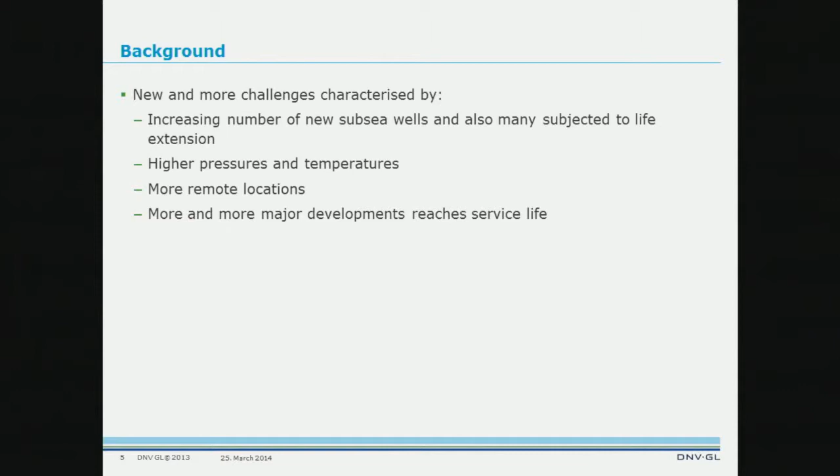So what is the background for doing this report, and what is the concern? We are seeing new and more challenges characterized by an increasing number of new subsea wells, many subjected to life extension, higher pressures and temperatures pushing the limits, more remote locations, more major developments reaching end of service life, and new actors entering the Norwegian continental shelf as operators.

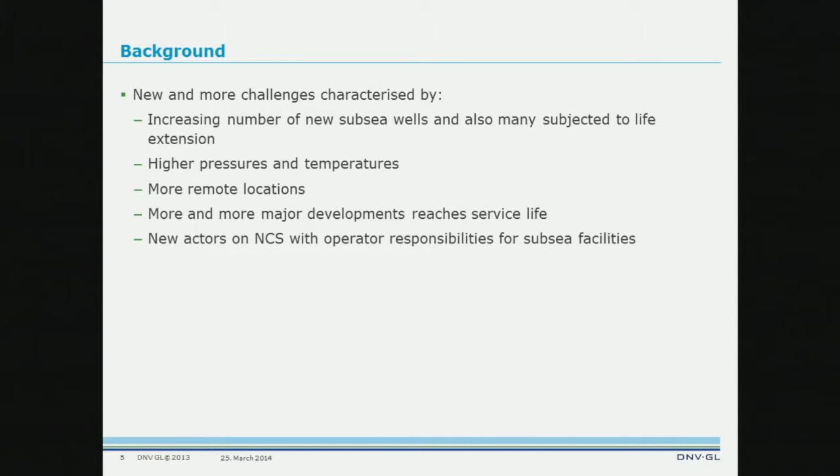Here, cut from the PSA's web pages regarding this meeting today: many projects in planning and implementation stages lead to PSA's expectation of high activity in evaluations of older facilities as well as installation of new ones.

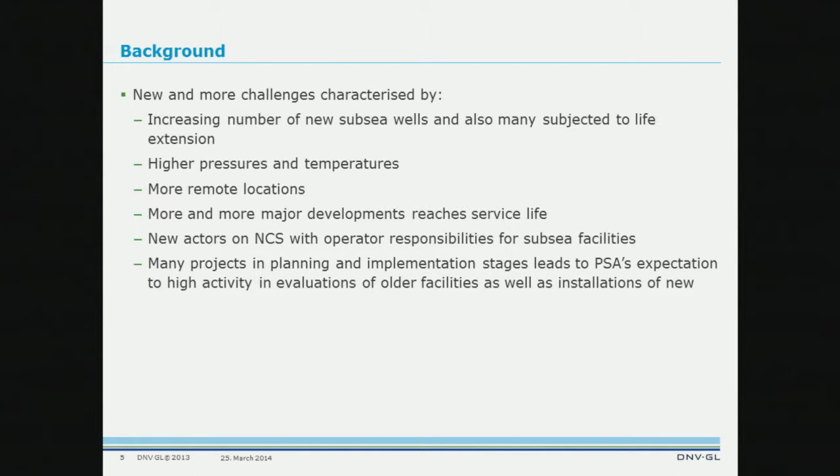In the big picture, if theoretically we have a fixed number of new fields coming up for development, more and more of those fields will in the future be based on a subsea solution. That means the net contribution of new subsea wells will be higher year on year, meaning we are having a kind of exponential increase in the number of subsea wells. This makes the population of subsea wells bigger, and at the same time we are extending the life of those already in service—combining pushing boundaries, extending life, and new operators.

So the general question is: are we exposing ourselves to a higher risk level with respect to possible accidents?

The purpose of the document: it shall raise awareness to the challenges in the industry, serve as a guideline to new operators and suppliers entering the Norwegian continental shelf, capture lessons learned from about 30 years of subsea development, highlight applied technologies and guidelines for different selection criteria, and serve as a guideline for operating a subsea field with organizational aspects as well as awareness of the physical degradation mechanisms that exist.

Share experience with incident databases and suggested improvements. And finally, the document is written to be educational—for those entering this industry, there is a lot of learning from reading this document. Seeing the purpose of the document, it is really a tall order, and we did our best to navigate and fulfill all those requirements.

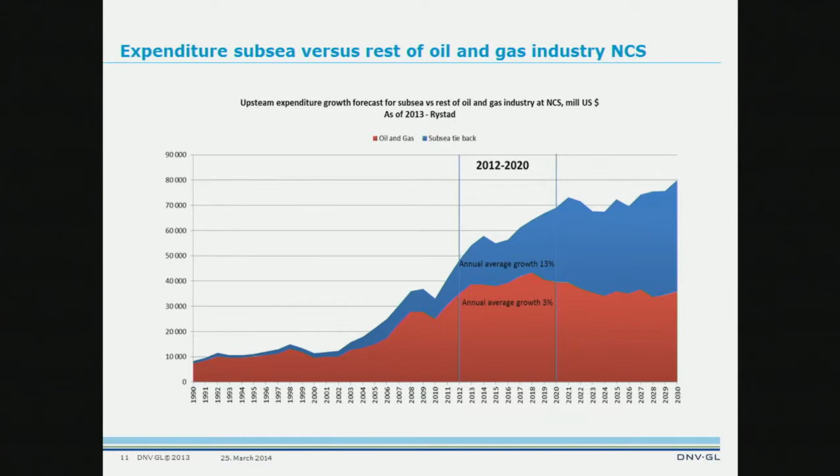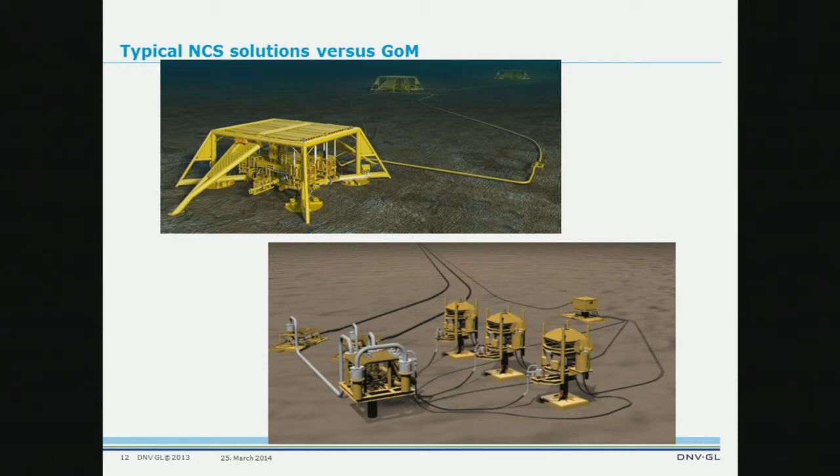The traditional way of doing this in other regions, this one taken from a Gulf of Mexico field that Chevron was developing years back. Here we have a manifold sitting on its own foundation, with the trees centralized and clustered around it. Here we have the tie-in points to a pipeline end terminal, and a jumper spool into our manifold. We also have the control system's subsea distribution unit, which controls and feeds the control modules on the trees and manifold with power and controls. That is also located here and is often referred to as the manifold control module.

So those are the basic differences in what we are doing in Norway compared to other parts of the world.

Coming to tree concept selections, in the first period it was the vertical Christmas tree, or the conventional tree, that was dominating the picture in Norway, making the word conventional in its full right. What happened from about 98 to about 2000 was a dominant shift to the horizontal tree concept in Norway, really a dominant position in that tree selection.

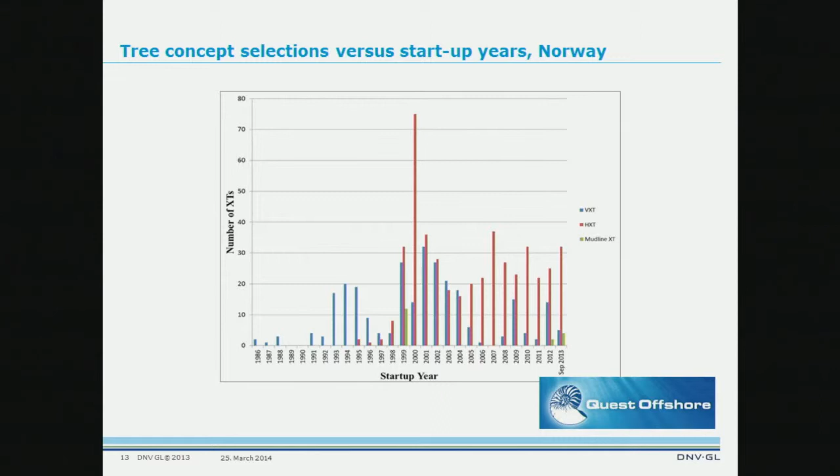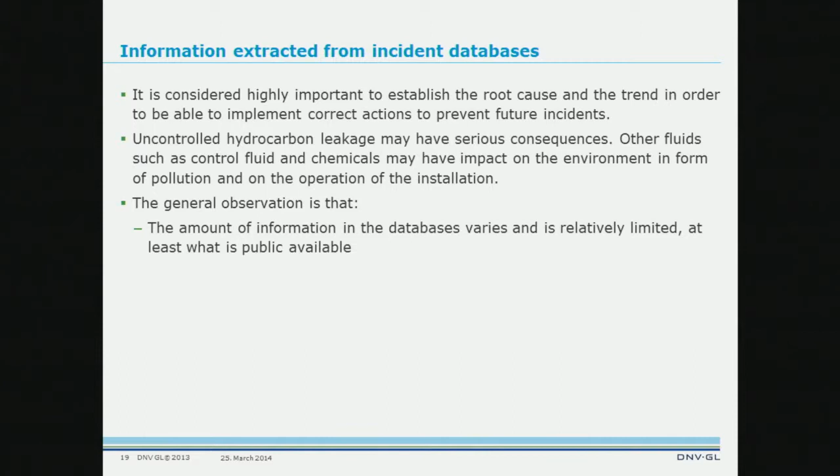There is limited information available on whether the leakage occurred due to operation outside the design or operation window. The information indicates that leakage often occurs during a transient situation, such as drilling, workover, or other intervention activities, and not so much in production mode.

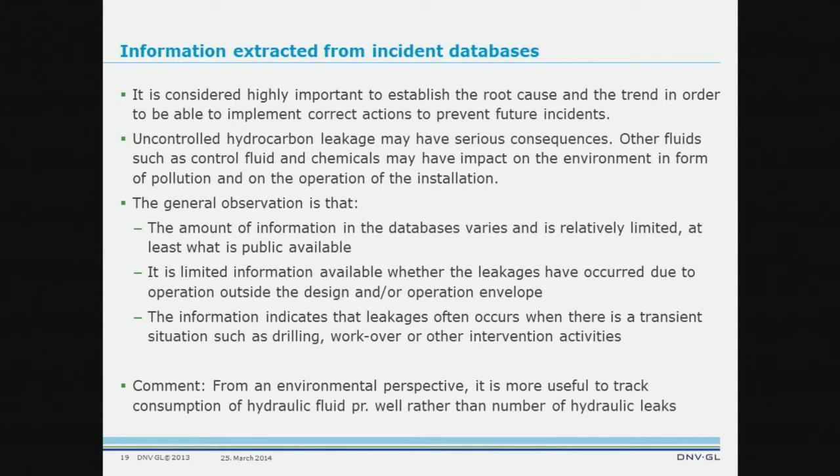We made a comment here yesterday. From an environmental perspective, it is more useful to track consumption of hydraulic fluids per well rather than the number of hydraulic leaks. That is because some of those fields actually have a quite significant number of liters of hydraulic fluid consumption.

So in the search for information on the largest accidents and releases of hydrocarbons from subsea facilities, public sources from the national safety authorities have been sought and reviewed. The content of those varies. Clear information on volumes, type of leakage, root cause, etc. is not easy to retrieve.

Also, the reports can be quite substantial, and we have to read quite a few of them to understand what has happened. However, the information in the databases shows that releases from subsea production systems are relatively few and small compared to those from other activities, installations, workover, and drilling.

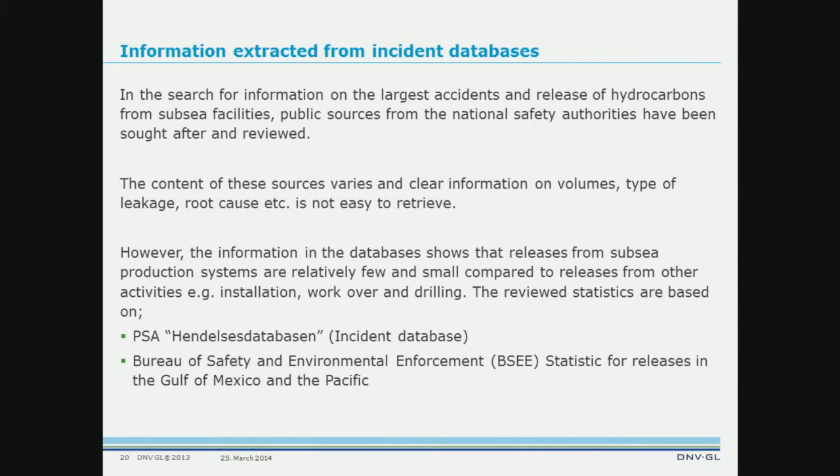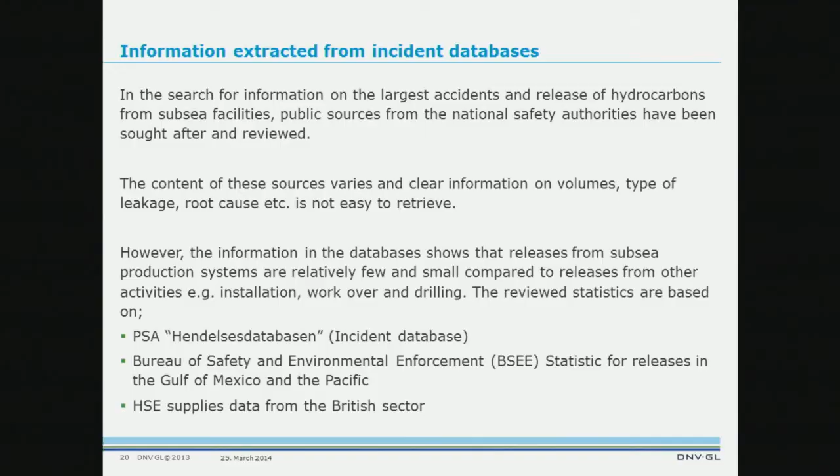The reviewed statistics are based on the Petroleum Safety Authority's Hendelsesdatabasen incident database, BSEE, and HSE from the British sector. Releases from subsea production systems are relatively few and small. I think that is something we have to reflect on a bit, so we can be a bit proud that the subsea station is basically sitting there and doing the job quite safely.

When we are interpreting the data, we see there are guidelines and guidewords for how you shall characterize your incident. We see that the one from HSE in the UK and the one in Norway, in a way, are quite conforming to each other. When reading them and the guidewords for how we characterize the different accidents, they are understood to be a bit different.

Here is the one we got from the authorities in the States, and we are seeing loss of well control here. When we see that one, it doesn't tell us much about the root cause.

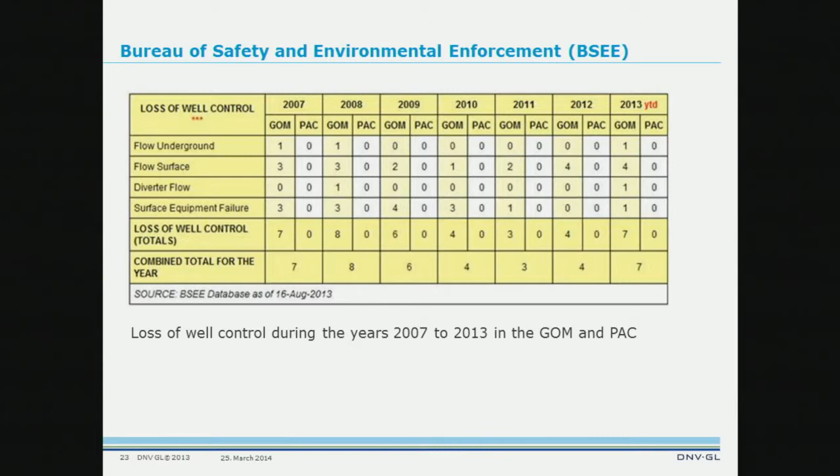General experience from those databases: the root cause is very hard to find. In many cases, it is not even clear to distinguish if the leakage came from a subsea or a topside facility. The impression is that in many cases, the incident is entered as an incident, and the information is not updated when the incident has been rectified.

So the conclusion is not there. The incident is reported in, but the conclusion is not there. Some reports are comprehensive in format, and several reports have to be examined in detail to reach a conclusion.

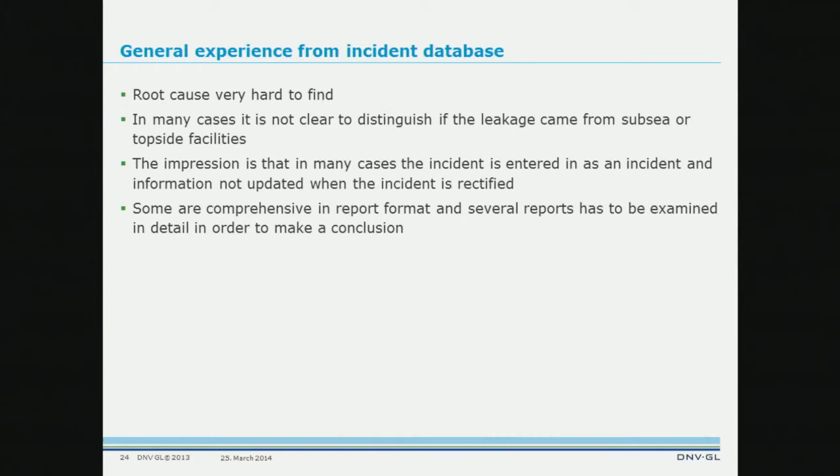So, of the incidents that we have been able to retrieve from public sources, from NCS, we have one in 2013. A bleed valve was set in the open position by mistake. The estimated oil spill was about 2.5 tons, and we have the reference here.

In 2003, the largest uncontrolled oil spill from an NCS subsea installation happened when 500 to 800 cubic meters of oil leaked out due to a rupture in the connection between the manifold and production line to platform. That one is also referred to in the report and publicly available.

From July 2002 until January 2003, about 30 cubic meters was released due to wrong operation of a valve on the manifold, also documented here.

UK, 93: there was a leakage from a wellhead on the UK sector where approximately 13.5 cubic meters of oil leaked out. The cause was mechanical failure during shutdown of the well, also documented.

96: a tree was leaking about 41.6 tons of gas. The operational causation in the HCR database is dropped object.

96: a leak was discovered during final commissioning of a subsea manifold. The root cause was identified as HISC. That one is also very well known in the industry.

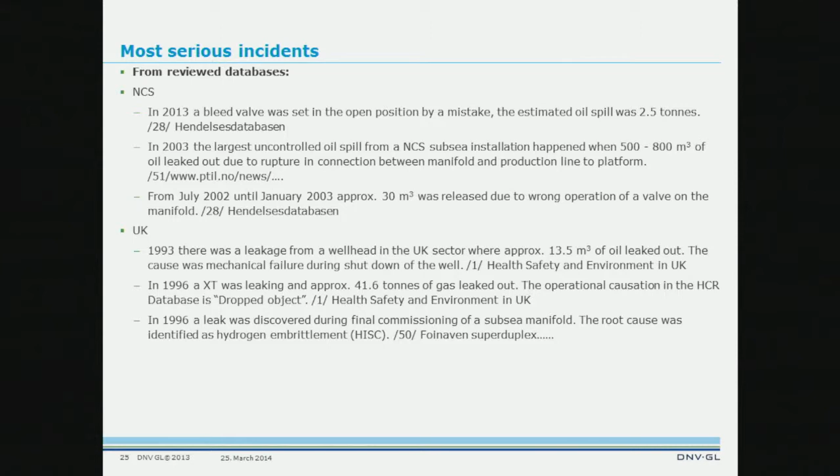So, integrity management. This section of the report describes several aspects: system integrity, subsea integrity management system, life cycle information, barriers - something Trond pictured in detail in previous presentations - threats, safety philosophy, integrity management process, guidelines and standards for establishing a subsea integrity management system, and main challenges related to integrity management in operation.

So first, a definition of subsea integrity management: the management of a subsea production system to ensure that it delivers according to the design requirements and national regulations, and does not harm life, health, or the environment throughout the required field life.

This implies that the operator needs to establish, implement, and maintain a management system that ensures integrity of the system throughout its life. So we establish the integrity system during concept, design, and construction, and maintain it during operation. Risk assessment and integrity management planning means inspection, monitoring, testing, integrity assessment, and mitigation, intervention, and repair throughout - and I would say it must also include the final stage.

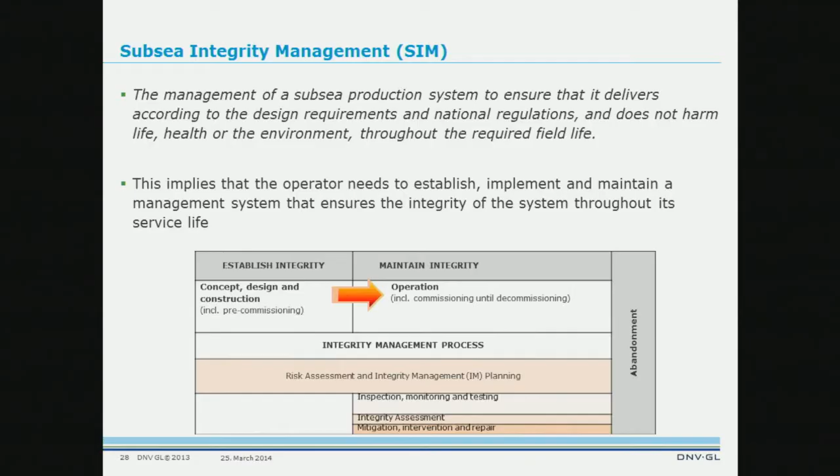Is there an existing prediction model in the industry? We are also giving references to what prediction models there are, along with a general comment on that degradation. So I said 15 mechanisms are described in the report.

When we come to thermoplastics and elastomers, again 15 mechanisms are described - what is the degradation mechanism, what does it mean, and what is the explanation for it? I think there's a lot of learning for the industry here to see what is actually in this report when we come to degradation mechanisms.

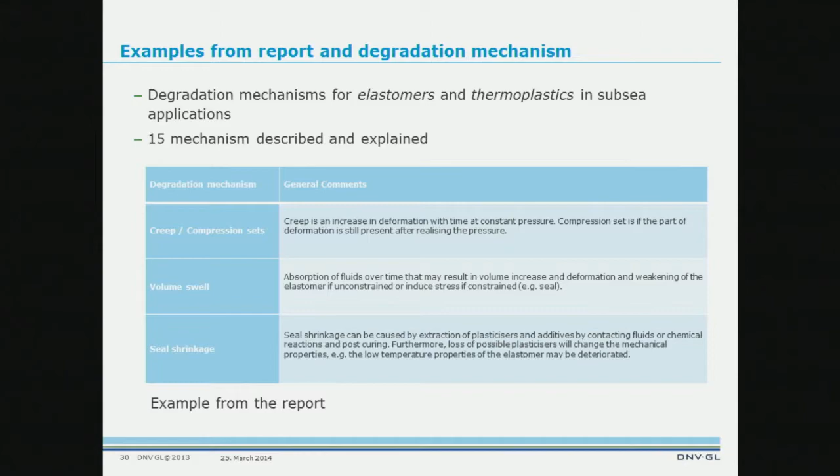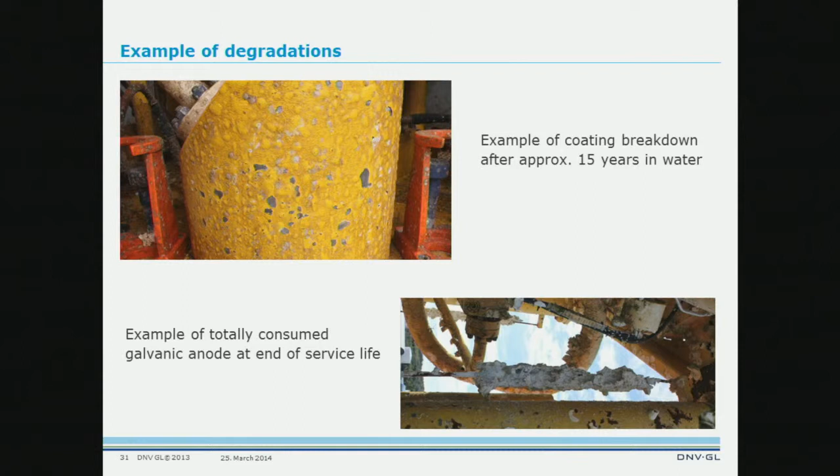When we come to threats, we have identified 69 threats, which are listed, documented, and explained - this is just an example. So here we just have two, but there are, as I said, 69 of them. There's a lot of experience transferred, given free to the industry through this report. By reading the report, probably a bit too much - but anyway, they are here, and I think it is good learning for the industry to have access to these.

So, future trends, developments, and challenges. Coming to that area, I really feel that OG21 with the TTA4 did a splendid job making a very good report, talking about the technology gaps for the future. They tabulate those gaps, and they say how much it will involve to design them, to test them, to develop them in figures and money, and also what is the time frame for that technology to be available and project selectable.

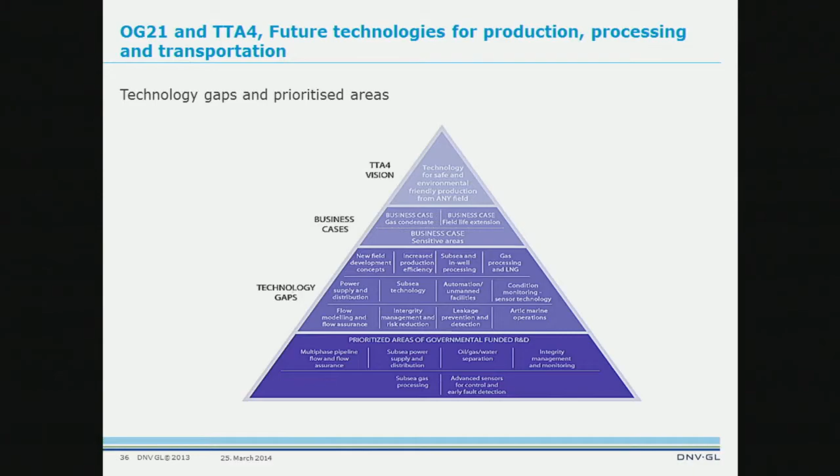Looking at this report, there are a lot of technology gaps in the hands of the industry, and also prioritized areas where governmental funding is required in order to get further. That report is also freely available on the internet, and for those who aren't familiar with it, download it, look into it. When it comes to technology for the future, I think it is one of the best and most comprehensive documents out there at the moment.

So a bit of advertising other initiatives going on in the industry as well. This one is going to be guidelines for how Petromaks and Demo channel their money, and also a guideline for the Ministry of Petroleum and Energy on how to plan for the political society for this industry in the future.

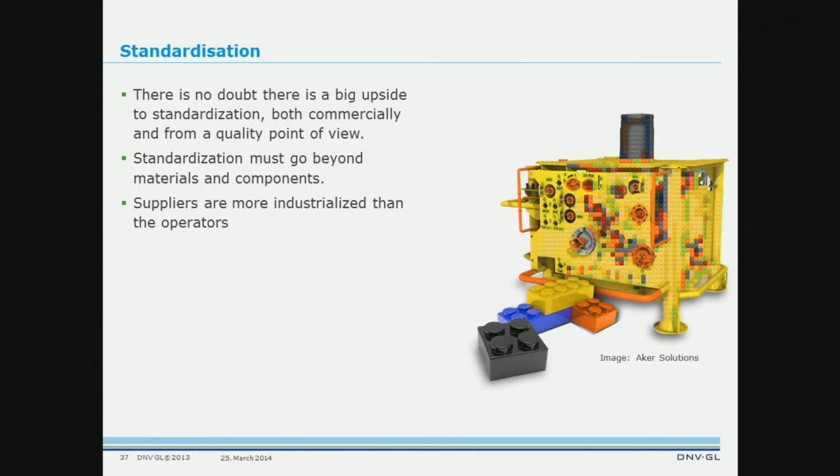So, standardization for the future. There's no doubt there's a big upside to standardization, both commercially and from a quality point of view. Standardization must go beyond materials and components. Suppliers are more industrialized than operators.

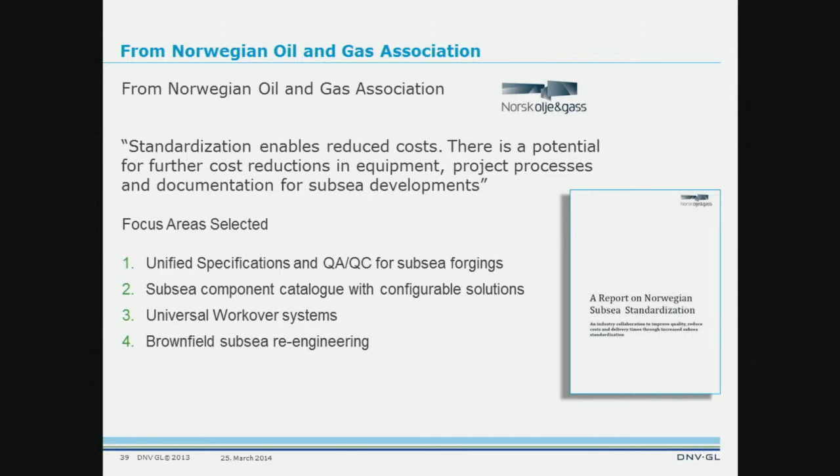There is a report that Norwegian Oil and Gas was commissioned to take care of, through Konkraft, with the Subsea Installations Network, and the contributors prepared this report. I think it's a good report, and what is said is that standardization enables reduced cost. There's a potential for further cost reduction on equipment, project processes, and documentation for subsea developments. Six focus areas were selected: unified specification and QA/QC for subsea forgings, subsea component catalog, universal workover systems,

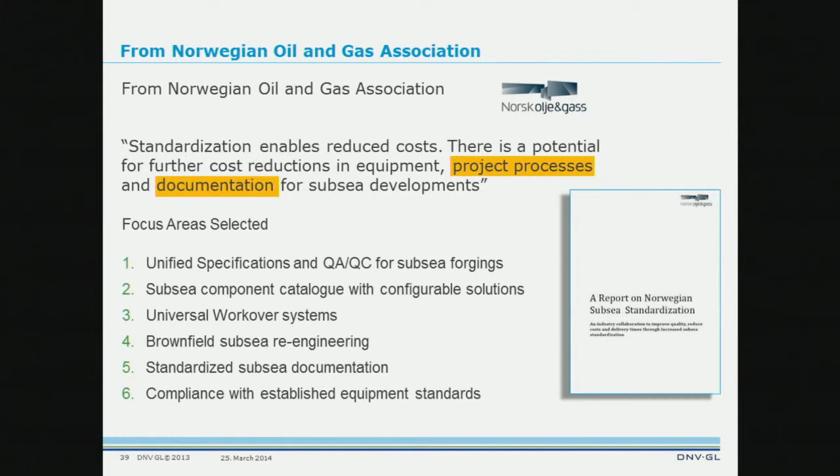brownfield subsea re-engineering, standardized subsea documentation, and compliance with established equipment standards. So here, both areas 5 and 1 are now in project phase and actually being taken care of by the industry. But I am personally very pleased to see that project processes and documentation are also addressed, and not only components and materials. And for those who know me, they're probably sick and tired of hearing it, but I have an example.

That is the Ford Transit. You can have it as a van, as a lorry, as a bus, different wheelbases, petrol engine, diesel engine, automatic gearbox, manual gearbox, different door solutions. You can make 15 million Transits without making two that are the same, and that's without taking into consideration the color. And who here would argue that the Transit is still not a standard product?

So that is a kind of food for thought. What is standardization? It is something more than just materials and components. I think we don't reach another level with respect to standardization before we address project phase processes and documentation, so that we know what the transaction points should be and look like.

During this report, I referred to the databases we consulted, but we also interviewed personnel working in this industry, working in oil companies, working on the contractor side, and also at Norwegian Oil and Gas Association. I think the engineers are pretty much aware of what is going on.

And with respect to what is happening now with standardization, they are saying we have to be a bit careful. Standardization is not a solution to everything, so we have to be a bit conscious of what we are doing. What is meant by that is that there is low acceptance for improving design, because the design has already been there and therefore it is standard, but this results in replication of former problems. So we still need improvement processes.

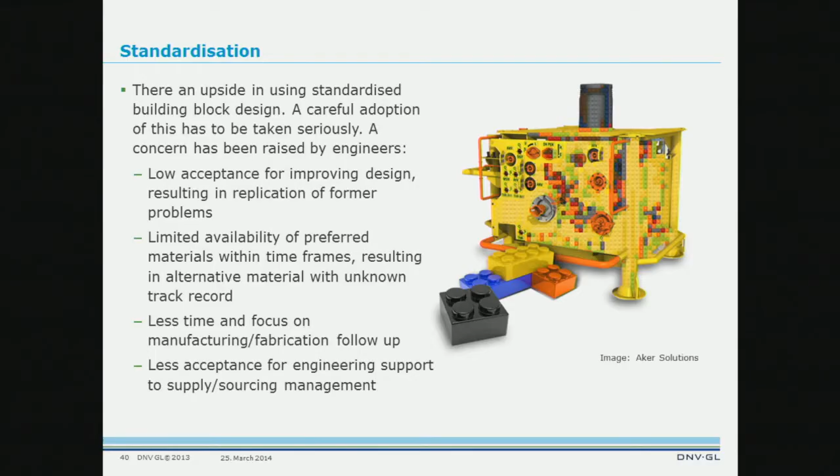Limited availability of preferred materials within timeframes results in alternative materials with unknown track records. There's less time and focus on manufacturing, fabrication, and follow-up, and also less acceptance for engineering support to supply and sourcing management. It is a safety-critical industry we are operating in, so even if it is a standard component or a standard project, we need to make sure we have engineering support.

So, 2 minutes left. Okay, I have to run.

Knowledge sharing across competing companies, buyers and sellers, is not easy. There exist real commercial reasons why knowledge sharing is difficult after incidents. It can be a dispute between buyer and seller, or a claim towards an insurer.

It would be of great benefit for the industry to have data as comprehensive as possible to allow trending and establishing root cause. From the Petroleum Safety Authority, it is specified what information shall be reported and what form to fill in. However, all necessary information is not always provided.

The subsea industry is today an international industry. The suppliers are international, the design codes are international, and quite a few of the operators are also operating worldwide. So that should be a good baseline for having a uniform way of reporting incidents.

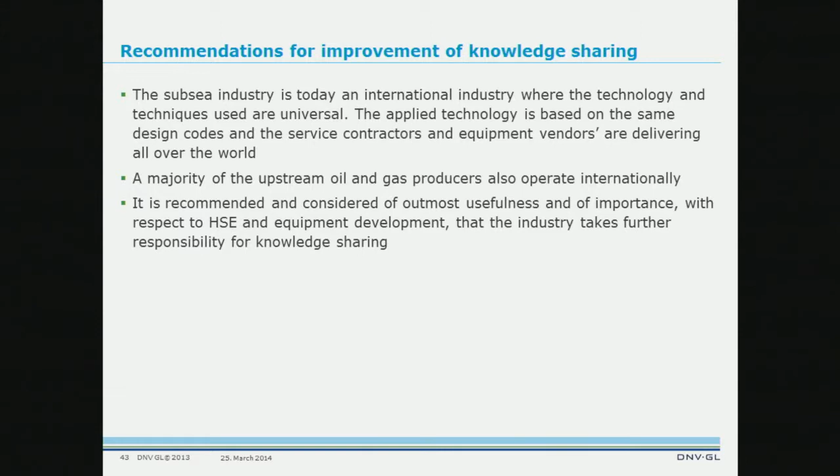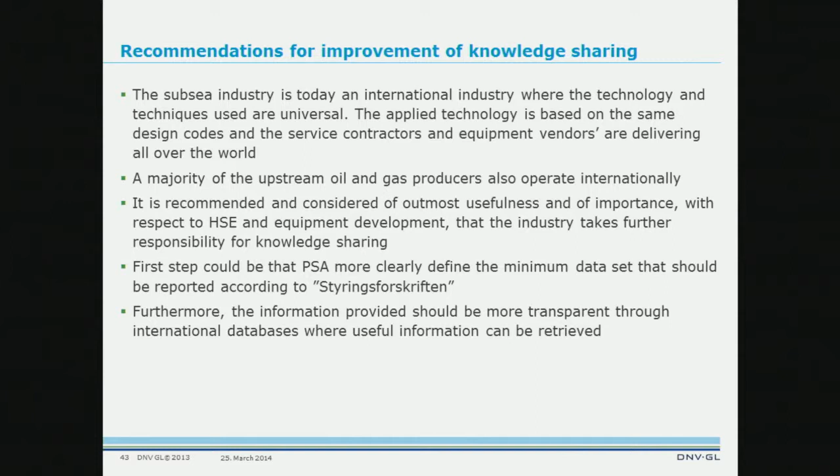It is recommended, and considered of most usefulness and importance with respect to HSE and equipment development, that the industry takes further responsibility for knowledge sharing. A first step could be that PSA more clearly defines the minimum data that should be reported. Furthermore, the information provided should be more transparent through international databases where useful information can be retrieved.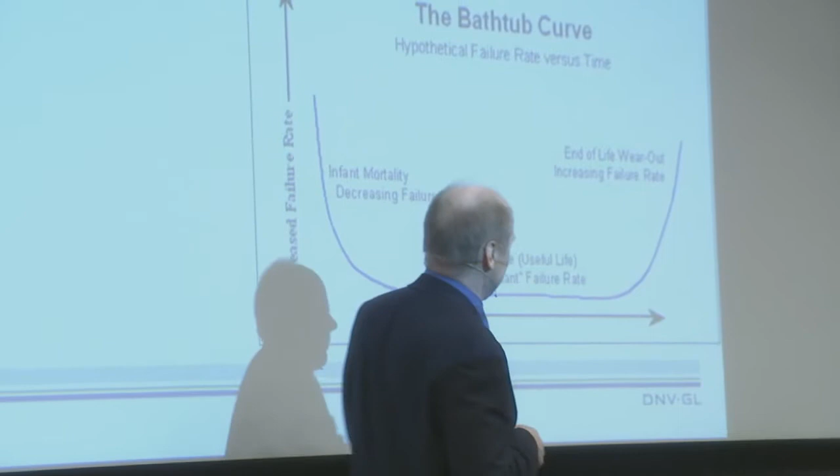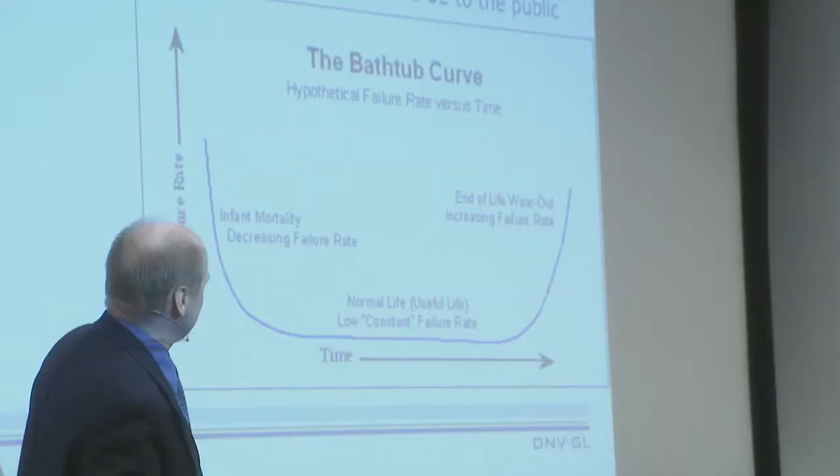There is not data to draw any conclusion about incident frequency related to new operators on NCS, which is also good. Dilemma: the more detailed and useful the database is, the less open it would be to public domain. And then finally, the final figure here. What we are seeing in this industry, where we have the traditional bathtub curve, is that there's no evidence today to see that we are in that phase. So if this presentation is going to be made public afterwards, we have to make sure that is understood. We are seeing an early failure rate, and we are seeing a randomized failure rate, but we don't have any evidence to see the bathtub curve increase in failure at the end of it. So my conclusion is that those systems are maintained for infinite life until the day they are decommissioned.

Yes, that was in a rush.

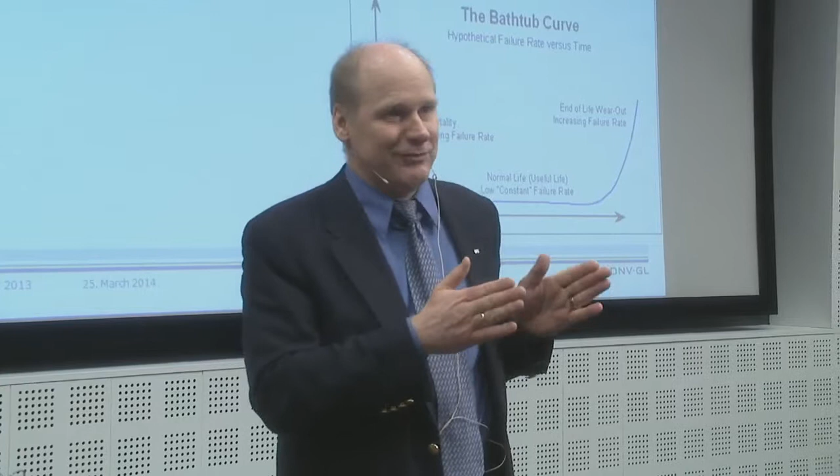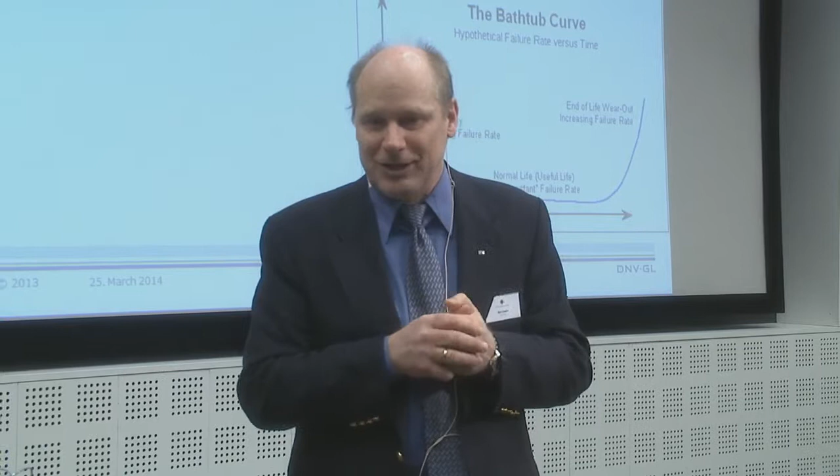But what we are seeing is that, for one example, Dong, 12 months after contract award, the subsea station was sitting at the seabed and producing oil. I think that is pretty good. And also we have to be careful how we are measuring the speed of doing the project. Are we measuring from when the decision gate was taken, or from when the PUD or PDO is approved, or from when the contract is awarded? But I think some of those newer companies have done, to me, quite impressive jobs, and the future will, in a way, tell if it has been successful. We don't know that yet, but so far I think it is very good.

Comparing the UK sector with the Norwegian continental shelf, we are blamed for being expensive here, but we're also seeing that on the UK side there's a tremendous problem with FPSOs that are in a worse condition compared to Norway, because of a cheaper product in the first place. So what is the end of the story? That's something we can conclude when the oil industry is over in Norway, I think. But in the meantime, I think the indications we are having show we are doing a good job, but we can of course be a lot better.

A comprehensive answer. I don't know if I was answering your question, really, but... I think I'm happy. Okay.

There are some differences in operating conditions that might be different for various operators. Also, when comparing, we have to consider there is no standard oil, no standard gas, no standard field, so there will always be different things giving different degradation mechanisms. Also inside companies, one project is run very well and another is not run as well. So there are a lot of factors influencing the whole picture.

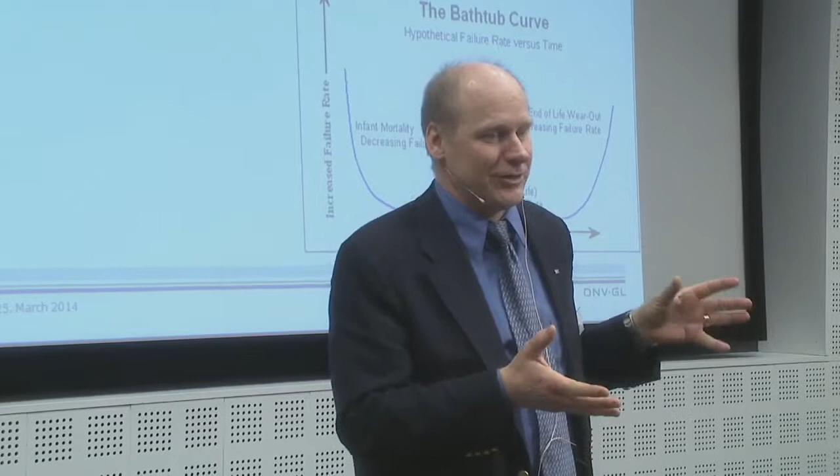Those figures you're referring to go back to the scope of this report, so downhole and in-well issues are not part of our work here. Trying to answer those questions would not be fair on me with respect to the industry. What is the main incident, or what are the main factors for why a subsea station doesn't work?

If we look at reliability figures, I believe people in this room would argue that the most frequent failure is in the control system. That affects the operability of the station and its availability. But there's no leakage to sea because the control system is failing, so we have to be aware of that. The biggest contributors have been material failure, I would say—either springs cracking, or hubs, pipes, or couplers cracking.

Just a follow-up question, not clearly related to the presentation, but in your idea, for Norway in particular, what are the ideal conditions for going for subsea production, or choosing this concept with respect to others? What would be your projection on what are the ideal conditions—physical, market, or political environment?